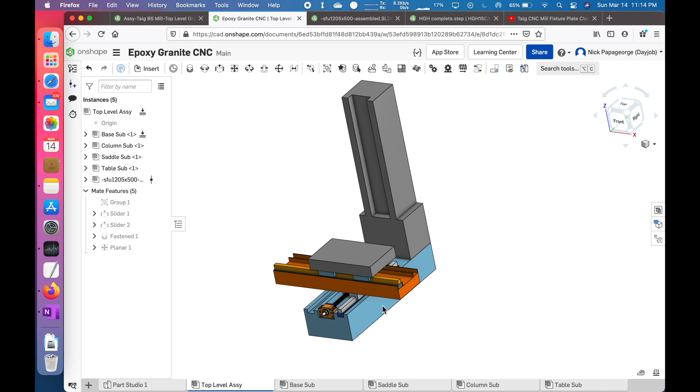Right now it's just roughed in to make sure travels are right and the working envelope is pretty good and everything fits together. As we go further along, I'm going to add a lot more details such as limit switches, bellows. Of course, the head's missing and the spindle's missing. It'll have feet. It'll have leveling features between the column and the base. A lot more features. This was just one day's work.

My mill right now is this Taig CNC. I also drew this CAD. And this machine works pretty well. My goal with this machine here, the epoxy granite, is to have a better surface finish than the Taig, to be stiffer, and to have a little bit of a larger working envelope.

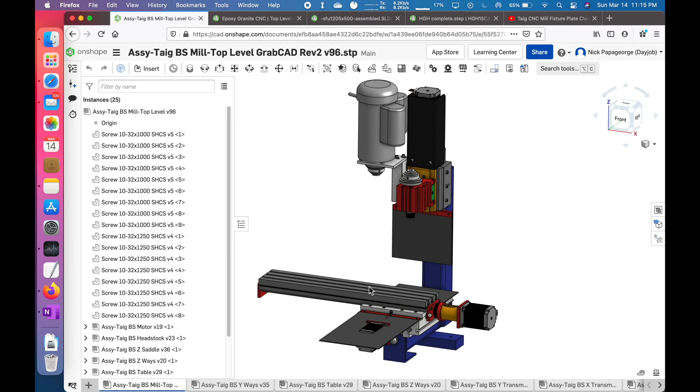Taig's working envelope is 12 inches on the X, 6 inches on the Y, and 6 inches on the Z. What I'd like to do for the granite epoxy version is to keep the X 12 inches, make the Y either 8 or 10 inches, and make the Z 10 inches. I think that will be plenty of room for the small parts that I'll probably be making on it.

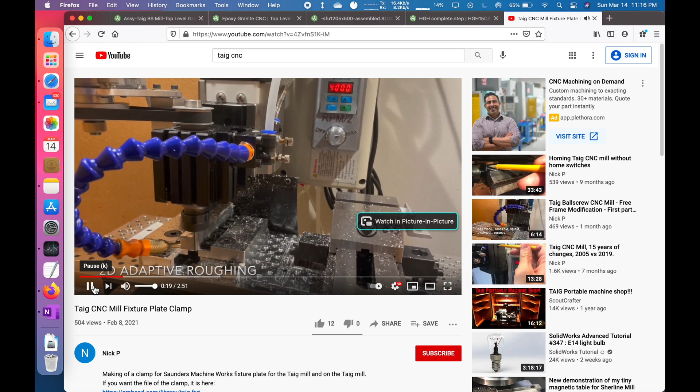Here's my Taig right now. This is actually my video on YouTube. So it takes a nice cut. And I'll probably use that machine to help build this machine.

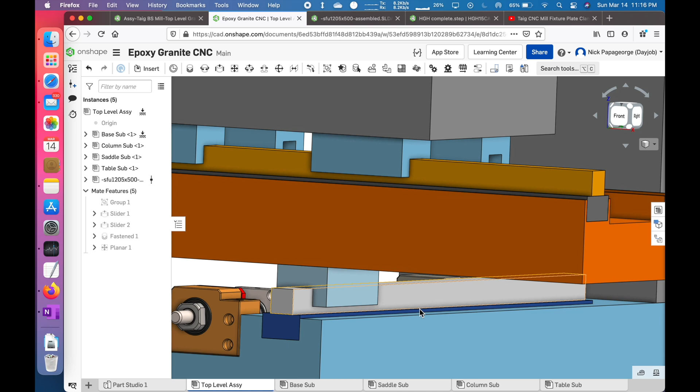Right now, for the linear bearings, the linear ways, these are 15 millimeter and they're just drawn as blocks. I do have the actual CAD for them downloaded, but I'm keeping this simple right now because I'm not sure what it's going to look like, so I don't want to waste time putting all those detailed features in. Ball screw, I did put that in to make sure I have enough clearance between the nut and the bottom of the saddle.

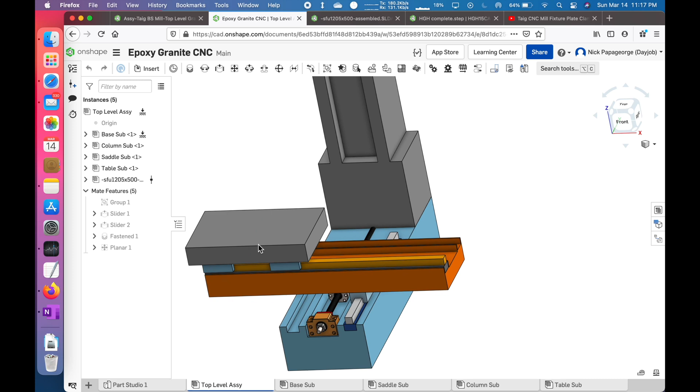And the basic design I chose for this machine is kind of like how the vertical machining centers are. So it has the base and then the saddle, and the saddle is larger than the table, and the table goes to the end of the saddle, as opposed to the design the Taig and some other mills use, where the saddle is narrow and the bed or the table overhangs the saddle. So they both have pros and cons.

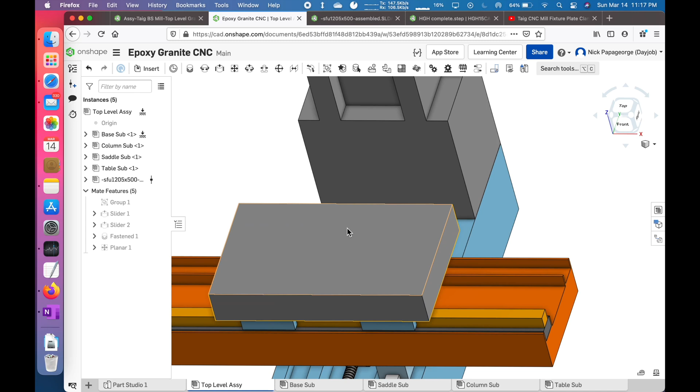One reason I want to do it this way for a do-it-yourself machine is once the spindle's installed, if this machine is built, I'll be able to machine the entire top surface of the table under the spindle power to make sure it's all flat.

The software I'm using for this is Onshape. I use that for my day job professionally, and they also have a free hobby version. I'm not affiliated with them at all, but I really like the software. I've been using Pro-E/Creo for 20 years, and wow, I like this a lot better.

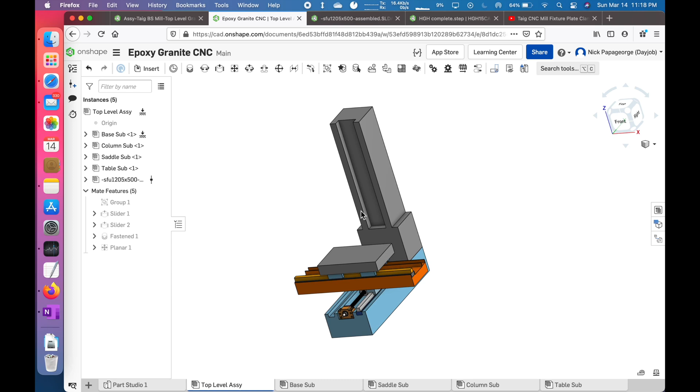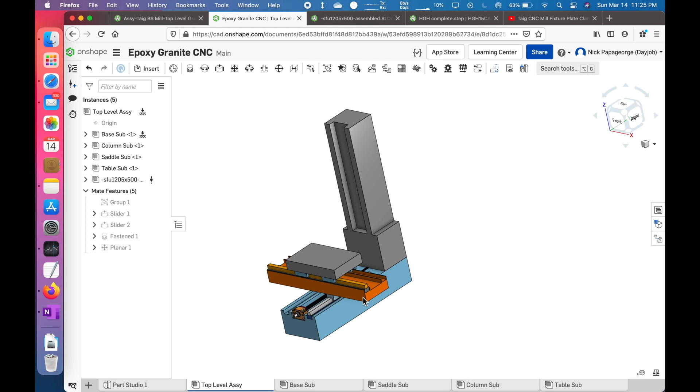I've never designed or built a CNC before, so this will be a new experience for me. I am a mechanical engineer in my day job, so I've designed a lot of consumer products and now some industrial products, but this is definitely new territory. So I'm not claiming to be an expert by any means. And actually, I just love machines, and I spent the last year just watching tons and tons of YouTube videos of other do-it-yourselfers making their own machines.

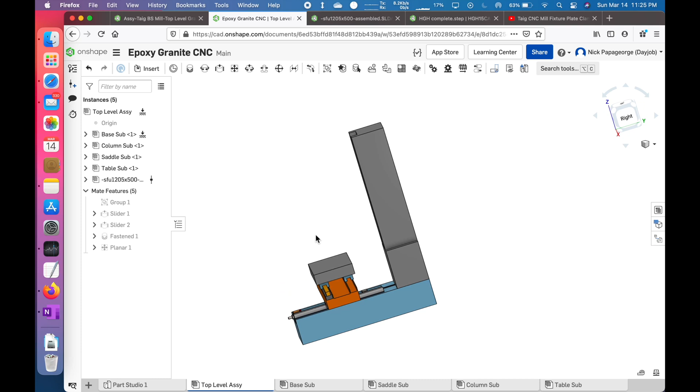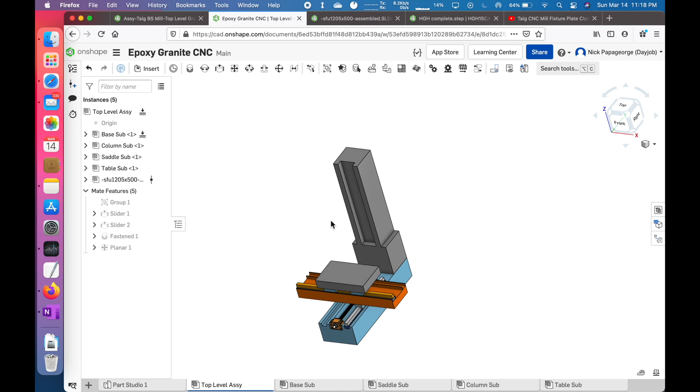So I'm kind of doing this for fun right now. Even if I never build one, I'd like to design one just in my spare time. It's a hobby to me. It's fun to me. I don't know if I'll ever actually build this. It's going to be a lot of work, but right now I just want to keep it in CAD, keep it in the computer, and see how far I can take it, and then see if I'll actually build it one day.